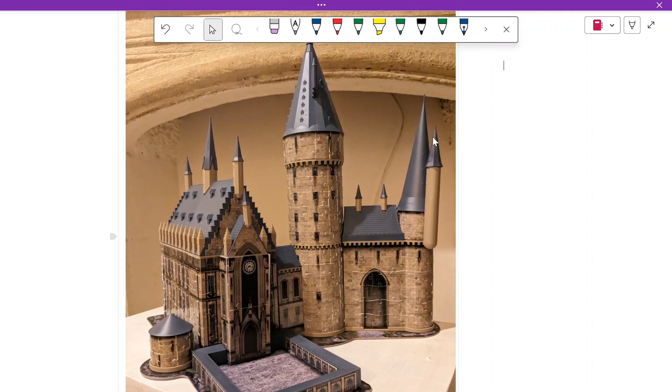After making it, which was a lot of fun, I decided why not make a 3D model of it on SolidWorks so the fun continues with this puzzle. I decided to make a tutorial out of it in case somebody is looking for a little fun project to do and work on their SolidWorks. For me, it's fun anyways. So that's what I'm going to do. I'm going to keep it very simple. I'm not doing it as I would at work.

I'm going to do it all in one multi-body part. To start any conceptual design, I usually have to get a good view on what I need. In this case, we already know we're replicating the model, but where do I start? I see two big structures. There is this part over here, and then there is this part over here. And anything else is secondary structures that either add some detail or do connections.

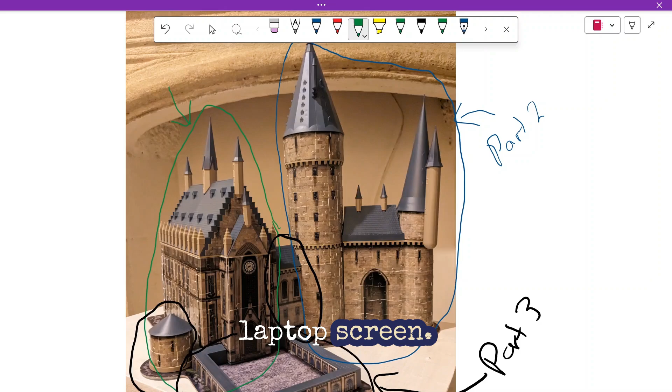So I think I'm going to start with this green structure over here, and then in a separate part video I'll do this part. I think the first part is a little bit more complex because you see all the detailing of the chimneys and stuff. And the last one and the easiest will be this part. So part 3, part 2. Sorry for my handwriting, I'm writing on my laptop screen. Part 1. So that's how it's going to go.

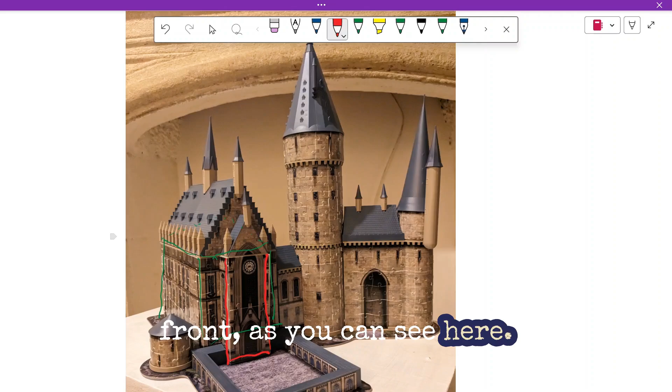Okay, first part, I look at the structure and break it into common shapes. I'm not putting any of the windows that are not extruding, the doorway, the windows, stuff like that. Instead, I'll do the bodies that extrude, and I'll keep them solid just to keep it very simple and beginner friendly. So what I see is that there is a big block here, and then there's a second block in the front, as you can see here. And then there are the triangular prisms. Those are the basic blocks.

After we have all the details of the chimneys, which are going to take a little while to make, but that's for the fun of it. We're doing this for fun, okay? This is fun. So without further ado, let's get started.

First, I'm going to start with the block. And I've already measured this. Your girl be organized.

12.5 centimeters. We're talking centimeters because I'm Canadian. Sorry about my American friends. And I'm living currently in France, which also uses a metric system. Sorry, not sorry.

This length over here is 23.5 centimeters. This width over here is 10. With that, we could make our rectangular prism.

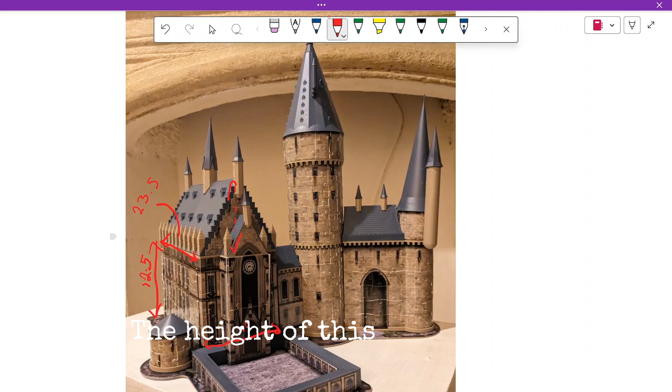And then after that, we could do the top, which has the following dimensions. The height of this is... Okay, I'm not that organized because I realized I did not write down the height of this. One second, please. We don't need the length because it's the same as here, the 23.5. And we don't need the width because it's the same as the 10 over here. And there is this part, which the height is the same as the 12.5. However, the width is 5 centimeters and the height is 4.5. Now, everything's approximate. We're not trying to claim that this 3D model is going to be absolute perfection because, again, this is for fun.

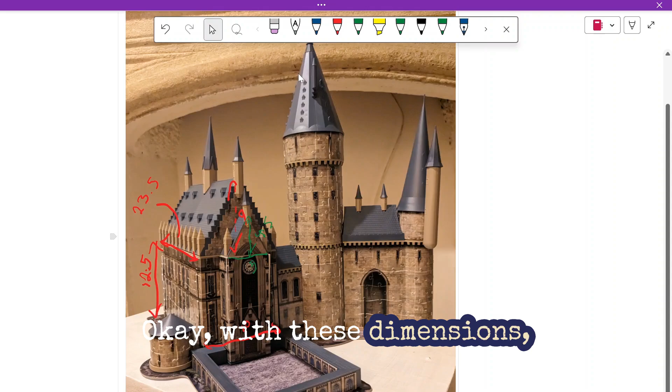Okay, with these dimensions, now we could start our basic building blocks. Allons-y. Okay, there's different ways we could do this. I'm just going to make a sketch on the top plane and extrude it in the Y direction. So let us do that. This one we said is... now my units are in millimeters.

I could change them to centimeters, but I think I'll just keep everything in millimeters. It's no problem, moving the decimal one place over. Voila. Okay, we had this as 10. What? Oh yeah, oopsies. That's going to happen a few times. I already know. Okay, extrude 12.5.

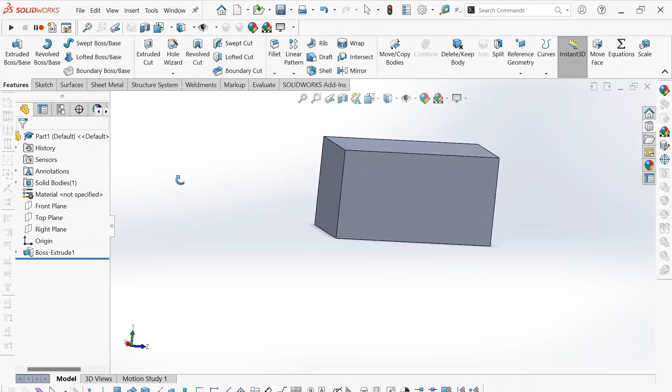Okay, now I should do the second block, the entryway, at the same time. I think I shall actually modify the first one and I'll just keep them together. I want to make sure that it's centered. I'm just going to make sure that the center of the line is vertical with the origin, which is the center of my big block. Now we need to dimension.

This one we said 5, so 50. That's good. When it's fully defined, it turns black, and when it's not, that means it's not fully defined. So this, which is blue, I can move it around like this. You want your sketches to always be fully defined, or else sometimes things get messed up and the sketches move and you don't notice it, and it's a nightmare to fix.

Now that we have sketch 1 with both rectangles, and because they have the same height, we could select both. You see, it gives a little preview. This looks good because they have the same height, we're extruding it the same amount, and it's easy to do at the same time.

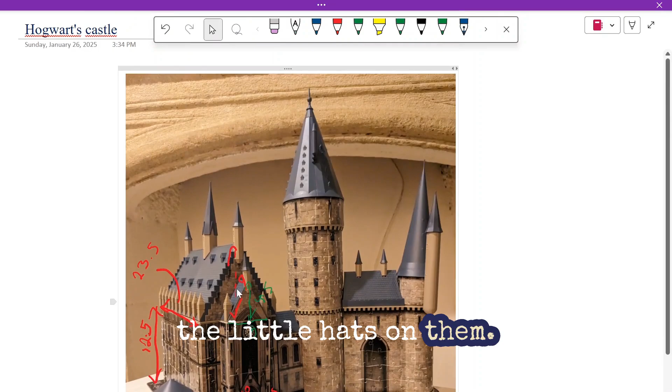Next, I want to put the little hats on them. We have one here with a different height triangle. They start from the same base, the top of the block, but this one is smaller and this one has a bigger height, and their extrusion is different too. This one is not very deep, same depth as this one, which was 2 centimeters I think. This one is 23.5. So I'm going to do either one sketch and extrude 2 different times, or 2 sketches. We'll see, that's going to be a surprise for me too.

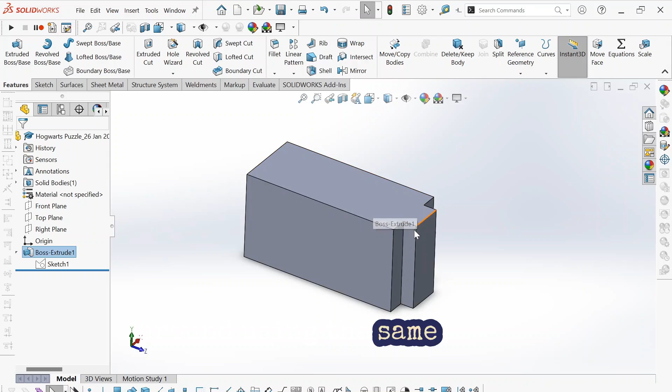I'll choose the same sketch to show you how to maneuver around using a sketch that has 2 different shapes and how to extrude it. So I'm going to make the sketch on this plane, right click and sketch. We're going to make a triangle, and I'm going to make sure it's coincident with this corner.

This shows a little guideline that it's centered around the origin, which is good. You see the yellow sign on the right of my mouse, I need to plug in my laptop. This coincident means that the line I'm drawing coincides with a point, which is the corner of my small block. It needs to be vertical and coincident with this.

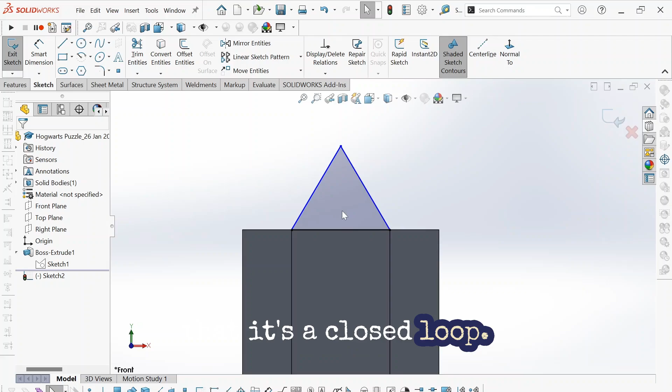Once it's grayed out like this, it means it's a closed loop. This line cannot be moved because it's black - why? Because one end is here and the other end is there. These two, although it showed it was in the guideline and vertical, we could move it around and have uneven sides, so we just have to put a condition. But first, I'm going to plug in my laptop so it doesn't die.

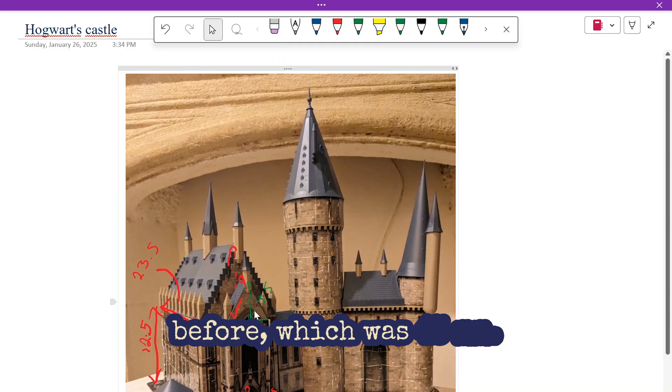So I was saying we need to fix our triangle. First of all, we're going to give the constraint that these two are exactly the same, which means our point can only go vertical now, which is good because we have to dimension it with the height of the triangle we had measured before, which was 45 millimeters. Okay, so that seems good.

I'm going to now do the bigger triangle. This time it's going to be coincident with here. We cannot extrude it if it's not a closed shape - if I had only put this line and not this bottom line, then I can't extrude it except as a thin body, I think it's called thin body extrusion, which is a different thing. We're not looking for that.

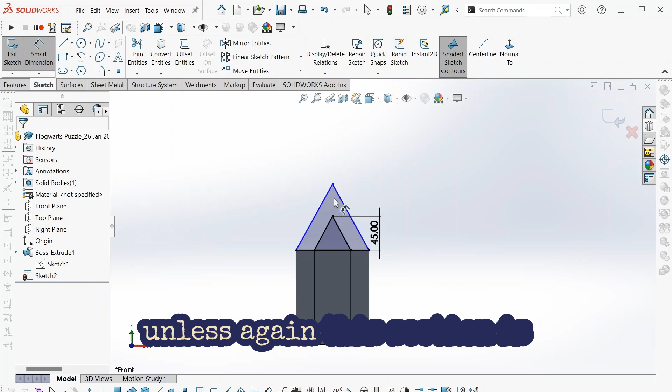Now I'm going to do the same constraints. I'm going to make this vertical with this. It's always better to have a base coordinate, for example the origin, to reference from. If ever this changes, we don't want this point to also change, unless this section is reliant on this section, which is not the case in our example. Okay, so this one is 90.

Both our shapes are colored in. That means they're closed contours, and there were black edges, which means they're fully dimensioned. Good, good, good. Looks like this.

Now, first part, I'm going to extrude the little one. By the way, you could hold down the right click, and here are common features - you could customize this. At the top is the extrusion, you see sketch 2 that we just did. But we don't want all of sketch 2, we want to start with this triangle, except obviously in the wrong direction.

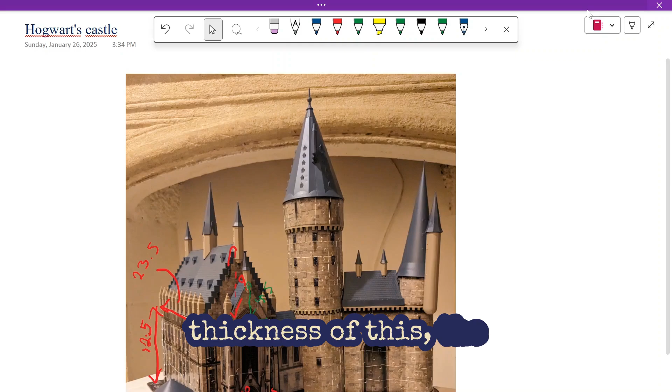We're not going to do blind, because here, this triangular section, there's a better way to extrude it. We know it goes from here to this plane - let me show you on the image. This triangle extrudes until this plane, or here on the block, because we don't have this part yet. So instead of putting the thickness of this, the better way is to actually reference the extrusion amount using this wall. Let me show you.

Right now, blind means that in any direction we could put any number and extrude it. Instead, we're going to choose the option up to surface. I want this from the sketch plane - we have other options, but here we're just choosing from the sketch plane, which started on this plane. We're going to extrude it to this surface - perfect, that's what I want. We could choose merge body. I will merge it, if ever we need to we could split the bodies, but I'll merge it just so it looks cleaner, meaning it combines and becomes one body. Okay, you see this part is looking good.

Now we're going to go to the second big triangular prism we have, which is this.

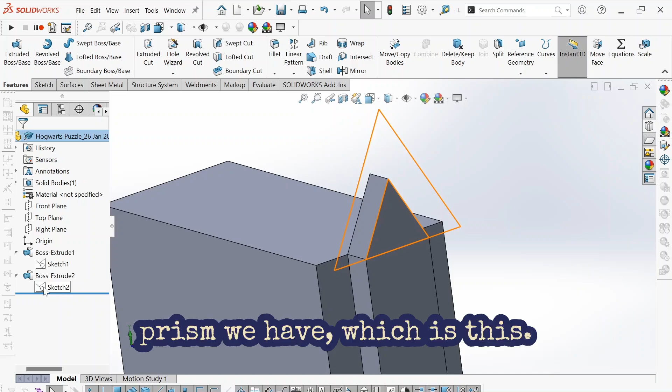We're going to do extrusion again. We're on sketch 2. If nothing's selected, I could go and select sketch 2. Right now, when you use a sketch, meaning you applied a feature on it, it gets hidden under that feature. So if you need to reuse the sketch, you could just open that feature and find it. This time though, I actually want just this.

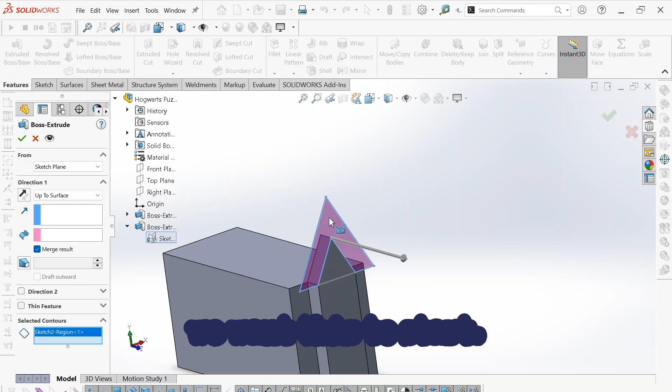Sketch 2 region 1, that's what this triangle is. If we use from sketch plane, it'll extrude it from here to where we want it. But we don't want that. We want it actually to start from this plane. So where this triangular prism, the small one, ended, we want this to start. We could offset it by giving a number, but again, it's better to use the geometry we already have.

So I'm going to do surface face plane, and I'm going to select this. Next, we can do blind, but I want to do up to surface like we have now. We don't need to set the direction because we're using 2D sketches, so it could only be extruded, in our case, in the Z direction. But if we had a 3D sketch, it could be extruded in different ways. I'm going to choose this because we want it to come all the way here.

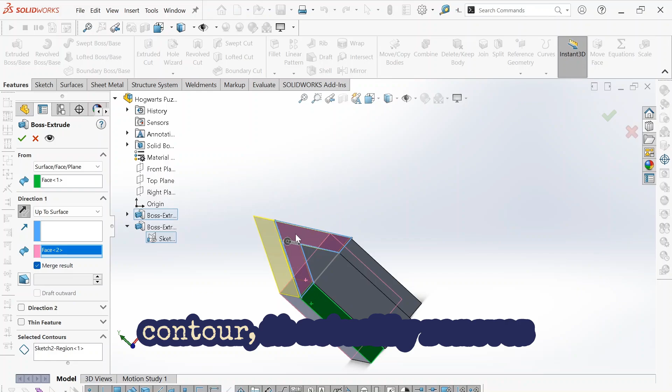Now look at this, in the preview there's a hollowed out triangle. Why? Because when I chose this contour, it removes this triangular part. So that way it does the full triangle. I selected the small one, instead of SolidWorks thinking that I'm taking a big triangle and hollowing out the small one from it, I'm going to just use both triangles to show that it's a filled big triangle like this. You see it starts on this surface and goes to this.

I will merge it again. Okay, this is looking good. At the end, we could also add colors and stuff, but don't worry about that. Let's go back to our image. We've done this part and this part. Those were probably the easiest parts we needed to do.

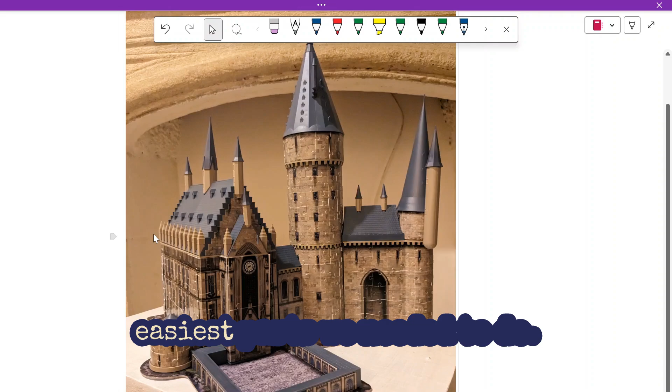Next, we could choose to perhaps do these little chimneys or these. I think I shall try one of these. Thankfully, with SolidWorks, we don't have to do every single one because we could just do a linear pattern, so we just have to draw one here. I don't know if you can see, but actually there's 11 chimneys on both sides, so there's here and here. The part that's a little tricky is that the chimneys, they're not rectangular prisms like this.

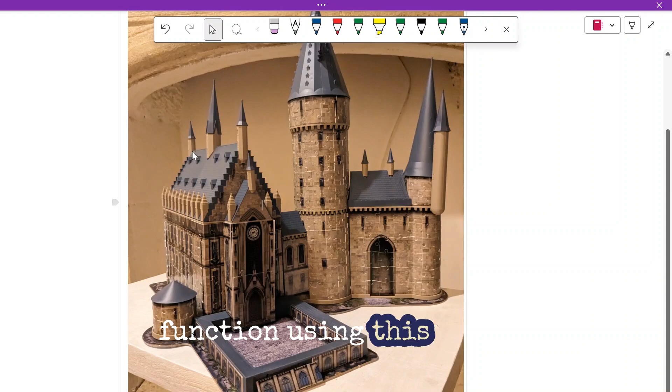Actually, it's slanted. So let's say we do a sketch on this plane, like we make a plane here and do a sketch on here. If I extrude that, it will extrude to the height I want, but then it's going to have a rectangular prism. And yes, I could do that and then use a split function using this plane over here to split it. But I could also just make another plane with the height I want, which here I measured as 10 millimeters, and then extrude it from this plane to the surface.

I'll show you, the other ones are just rectangles that you extrude and offset little by little. Let's see how that would be in real application. So, like I said, I want to make a reference plane. I want to make a plane that's 10 millimeters above this line. That's the start of the lower part of the chimney, and I'll extrude it down.

To do that, I could make a plane. The first reference, I'm going to take it as top plane, so it's parallel. I can put, so technically I know the heights that I want, so it'll be the height of this edge, which was 125, plus I'll do 10 millimeters, which is the height of the bottom part of the chimney.

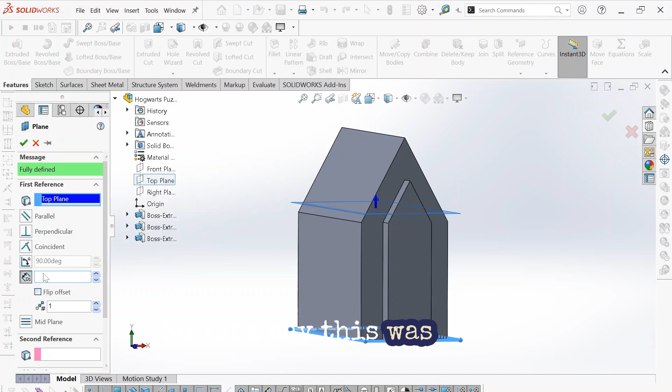I could have also made another plane with vertex of this. I'll actually show you. So let's say this was here. I could do a second reference of this reference plane. I put the top plane, so that way it shows it's parallel to the top plane. Second reference, I put this vertex and that it's at the level I want it. Now, I don't know how to actually raise it 10 millimeters, so instead it was 125 plus 10, so 135, whatever, okay, we're doing shortcuts.

Okay, so I want to sketch on this plane. Right-click, sketch, and I'm going to make a square. The first one starts right at the edge here, so I'm going to do a coincident.

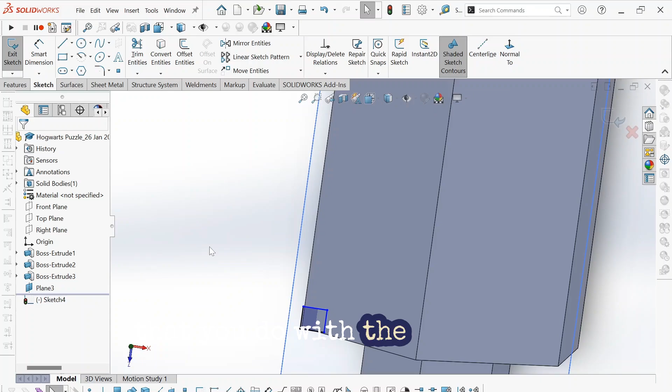I right click, it's the same thing you do with the features. You could do that in Sketch too. Right click and move up, it gives me the dimension. I believe I measured at 5 millimeters. I could do 5, or say these are equal because I'm assuming that's a square.

At the same time, I'm going to do the little extrusions that are on top of your chimney, the little details. So to do that, I'm going to simplify it a little bit, and just do offset. It's an offset entity function, which takes the entity you give.

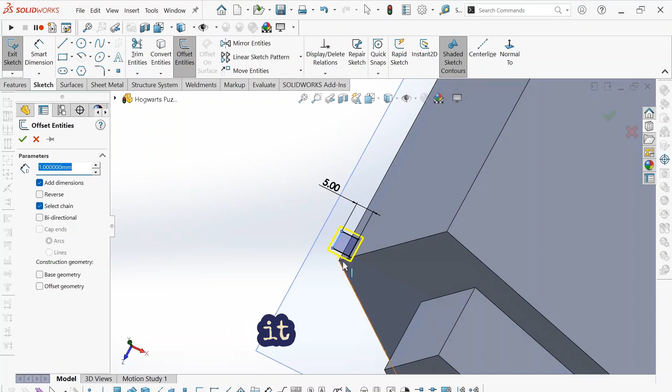I press on one edge, but because it's closed, it selects all of it. And because I said select chain, I'm going to try doing one, but it goes outside. So I'm going to reverse. Okay, let's try that. I'll do the same thing a couple times. I'm going to do reverse again, so it goes inside.

Here, I could only do this a couple times, so maybe I'm going to do 0.5 instead. Okay, this seems better. Same with this one, I'll change it to 0.5. Okay, now I could do it, because in the actual puzzle, it'll repeat like 6 times.

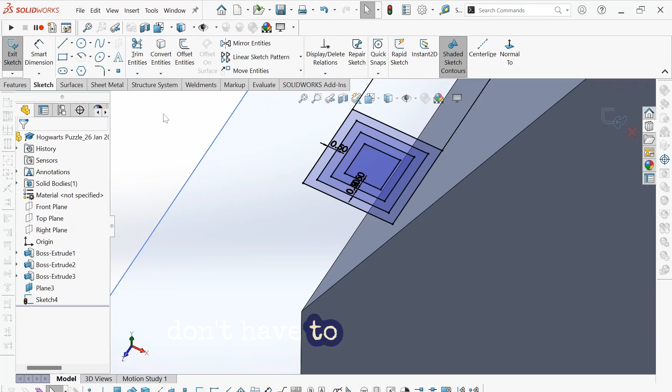I want to make the difference between them a little bit smaller, so I could repeat the pattern a few times. Reverse. Good thing it takes the value you last put, so you don't have to do it again. And repeat, reverse. Too bad it doesn't keep the reverse checked. I could do, for example, 0.25, maybe.

Yeah. Do I want to? Yeah. You know what? Yeah. Let's do it.

Okay, so now we got our sketch, which looks a little busy, but fear not. Planes usually don't get hidden automatically, so I'm going to hide it myself.

Extrude. So first I'm going to start with the outer corner. Here, I'm going to switch the direction. Instead of doing up to surface, which might work, let me see. Yeah, it works. You could also do up to next.

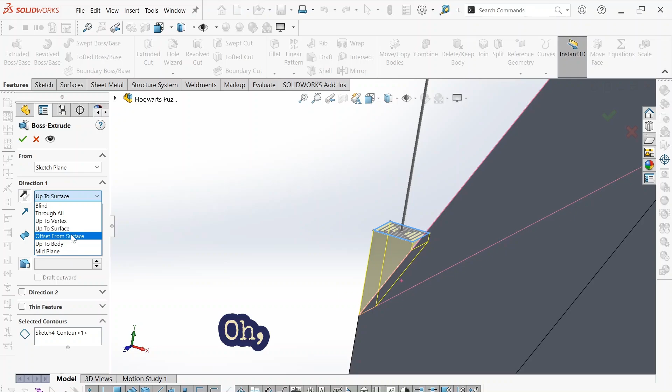Oh, it's not here. Okay. I don't know why it's not giving that as an option. Oh, was this here before? Am I losing my mind?

And you could also do up to next, which just goes to the next body, from the surface to the next body, or you could do up to surface and select this. I'm just going to do up to next.

However, I am going to check off the merge, so I could actually see the line differentiating this part of the castle and the chimney. Okay, let's see what it looks like.

Okay, that's fine. If we had done merge, this line here and this line here would not be there. As you see, the line for the triangle isn't appearing because we merged it. If we uncheck it, it would show. Okay, so that's fine. We need the sketch again.

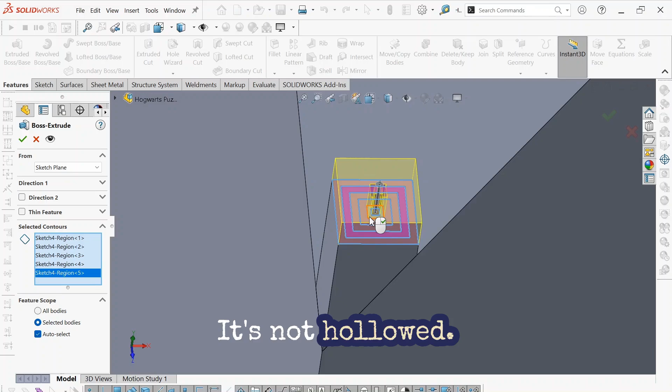Okay, this should be good. Let's see. Oh, I forgot one. The little one that I decided to add in is giving me trouble. Oh, this one says contour. Did it work? It didn't seem like it. Okay, seems to be okay.

I'm actually going to let this sketch show until I'm done with it. Except I extruded the outside, the very outside too, which is not the point. So I'm going to remove this part. See, now it's making the little ridges.

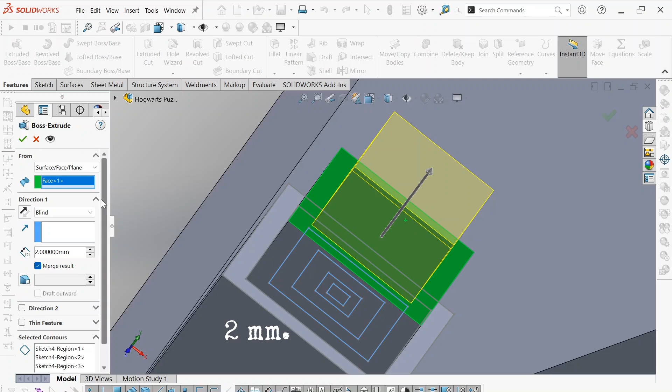I'm doing it from this surface because I don't need it to extrude from this surface, where the sketch plane is, 2 millimeters. I want it from here, 2 millimeters.

If you see, if I just do this part extrude like this from the sketch plane, you don't see it. So that's why I say from here. Now you see it.

So you see, I picked this one by accident, so I'm going to try this one to see how aesthetically it looks. I could hide this.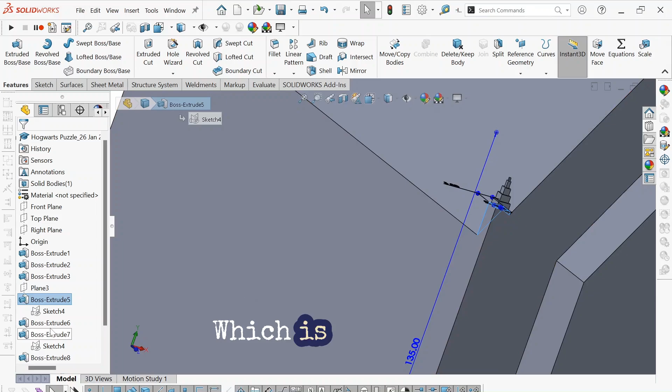Did I check? This is unmerged, which is good. I don't know why it merged it here. This one is this block, which is this one. Let me see if I unmerge it, what it looks like. Oh, okay.

I'm not sure why. I think I know why, because I did it from a sketch plane. Let me try this. Yeah, I don't know. But it looks okay now. Not bad.

So now we're going to take this that we've made and we're going to repeat it. Okay, to pattern this, you could rename these. When I'm doing it for professional reasons, I do rename because all this seems a little confusing.

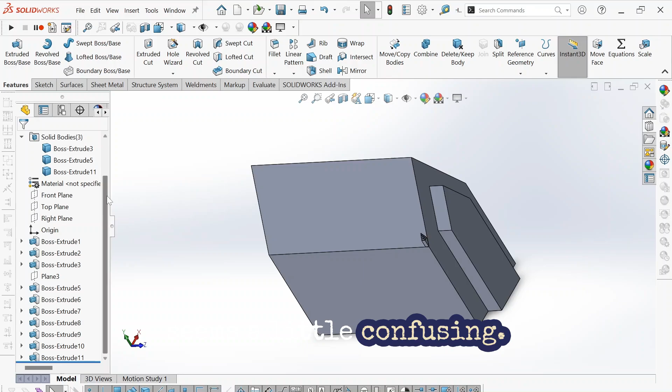Here in this tab, we have the bodies, and we have this big one, and we have this part of the chimney. Let me zoom in, this part and the top part. So I'm actually going to combine them. It's cleaner and it's easier to pattern. You could also select it from here. And we're going to add.

Do show preview. This will be a body. Good. Now you see there's this one, which I'll put as main. And this chimney.

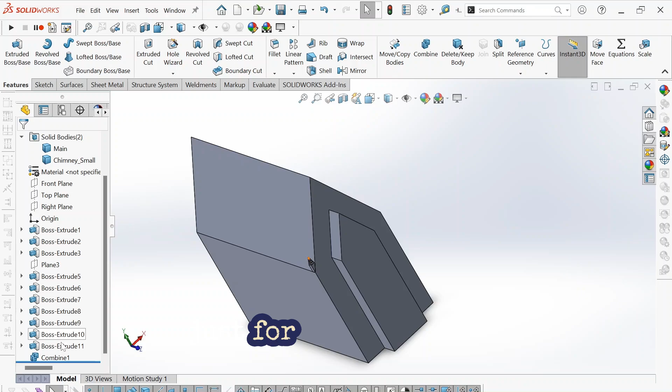I want to do a linear pattern of this. So I'm going to go to my linear pattern. I'm just going to choose what it is. Here I would have to select all, but instead I'm going to do bodies. And that way I go here, solid body.

I only have two, main and chimney. I want the chimney, it selects all of it.

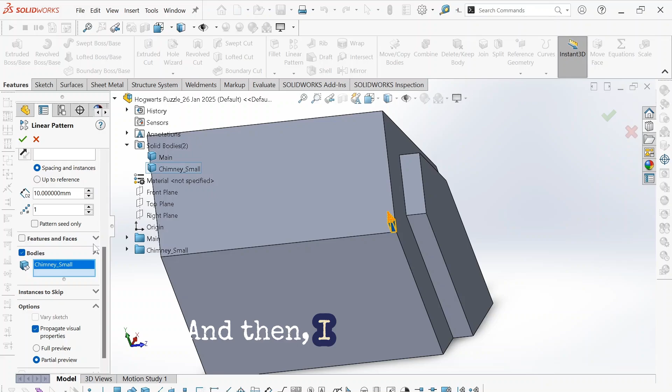And then I go up here. I only need one direction. The direction is along this edge. That's going the wrong way, but that's okay, we're going to change that.

So give, for example, 20 millimeters in a different direction, etc. But I haven't measured the actual distance between the chimneys. I know I want the chimneys to come all the way here. So what I'm going to do is select my reference, this.

I could either do it with the centroids, the middle of the body, or I could select what reference of the body to use. I know that the outer edge here needs to end here, so I'm going to choose this point.

Instead of giving a distance, I think we counted 11. Whatever, so now we have 11 chimneys that start here and go up to this reference. And I gave the specific vertex, this point here, to end at our reference. So if I say OK, see that it's what we're looking for.

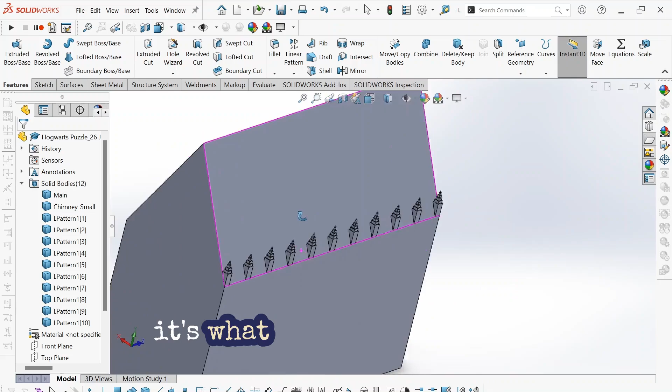Now I'm not going to do the other side because there's other detailing I'm going to add here, and then I'm going to just mirror it. So I won't do that right now, I'm going to do all at once. Always try to minimize the number of procedures you want to perform just to be as efficient as possible.

Now, if we go back to the picture, we've done this part in the main blocks here and here. But now we have these chimneys to add, which are the same, but they originate at a different point, although they're at the same height.

So maybe I'm going to use the same plane again, but do a separate sketch. Instead of using this edge as a point to be coincident with, I'm going to make it this edge. So we'll see what that looks like.

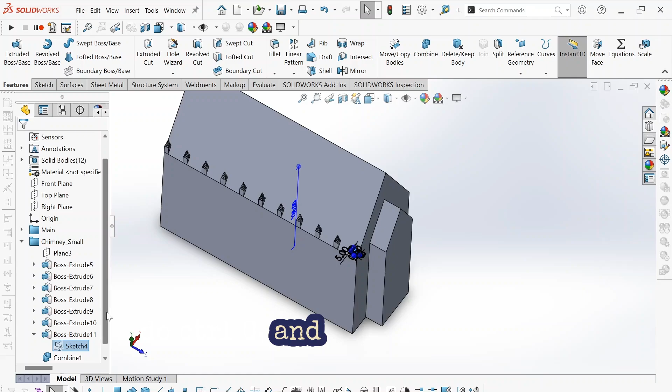So what I'm going to do is, I think I could copy this sketch directly. So I selected it, I do Control C, and then let's go to the plane that we had, sketch, paste. Okay, so you see that it's pasted over here. I'm going to, oops, no, that's not what I want.

I'm going to select, let's see if we could move entities. And I want to move this, let's say this. Okay. From/To, I don't have the actual x coordinates, but so we do this.

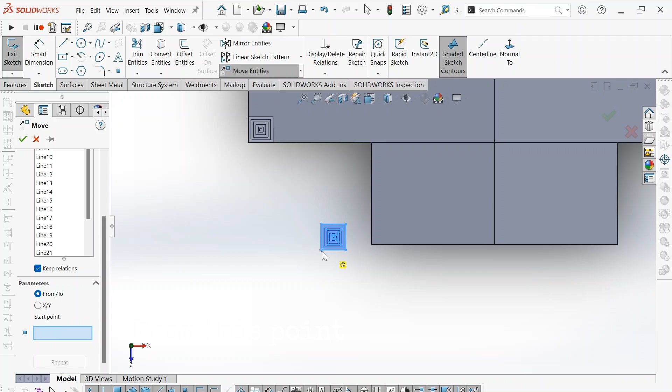I'm going to keep relations of them from this point to this point. Now you see it's still blue because there's no dimensions. It just copy pastes the lines that you have, but it doesn't carry over all the dimensions you have.

So this, let's see why. Okay, so it's not exactly coincident. So I did this, now I do this. It's a little tedious, I'm sure there's a better way, but I didn't think of a better way.

My bad, let's see. Where's my midpoint? Is my midpoint? Oh, here, so this is a filter. It only selects midpoints. Let's see if it works. No, it doesn't, it's okay.

Let's see, this. It's a little tedious, I'm not so happy with it. I think it's easier to offset. Don't you think? Yeah, let's do that.

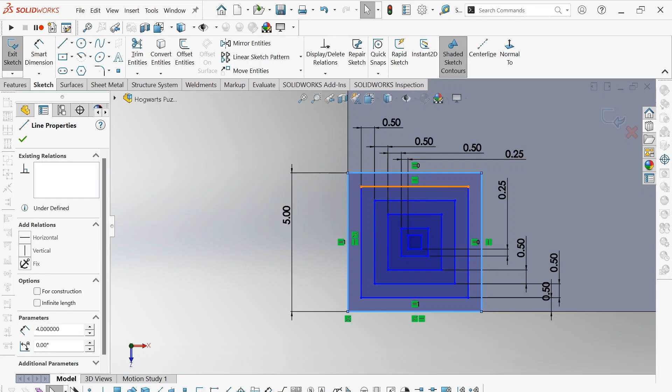I think if I just restarted the sketch, it would have been faster. But I'll leave this in just so you see the thinking behind design, taking away maybe not thinking which is the most efficient way, and then regretting it later.

Okay, we're going to do, it was 0.5. Oops, 5. Okay, and reverse. By the way, the shortcut is enter. If you've just used the feature, you could click enter to repeat it. So right now, press enter. Perfect, good, enter. Good, and last time, enter.

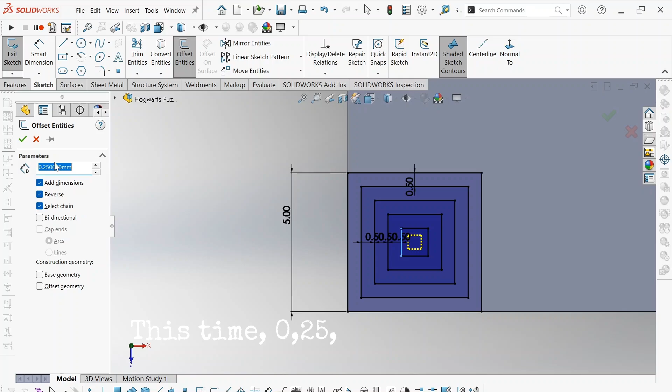This time, 0.25, I think it was. Voila, that's good. Okay, and basically, I'm going to do the exact same thing I did before.

So finally got this part done. But the little ones here are good. Next part, we're gonna do the little rooms that I'll show you in the picture. Now we're gonna put our attention to these little ones. We're gonna use the same concept as we did here.

Have a plane that starts a little above the roof and I extrude it downwards using up to next. And then for the little triangular part, I don't know if you could see, the triangular part extrudes a little bit out and goes to the roof.

So I'm going to use an offset plane for this surface because it's parallel. I'm going to extrude it like a millimeter out this way and then use the up to next function to extrude to the roof. And then we're going to pattern it. And I know that there's one here that is not included. I'll show you how to pattern and remove a single one or random other ones if needed.

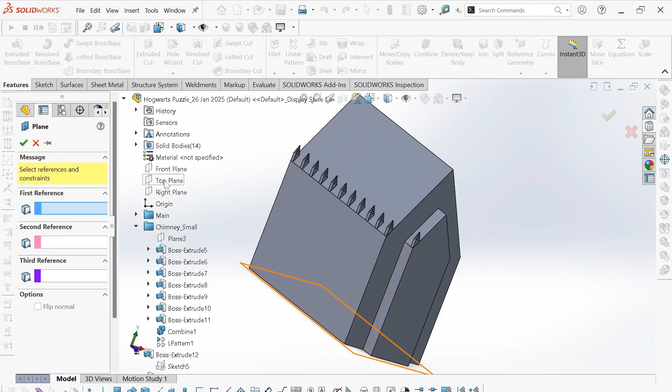I took some measurements. The first row is about 40 millimeters after this. So I'm going to use the same concept to make a plane, using the top plane as reference. Again, I could make a plane here and then measure it, or I know this distance. If ever I forget this distance, I have this measure tool. I put it up here, but you could search it up if you don't have it in the search command.

So I know that this is 125. So here I could say 125 plus, I know it's 40 millimeters more high. So it's here, which is good.

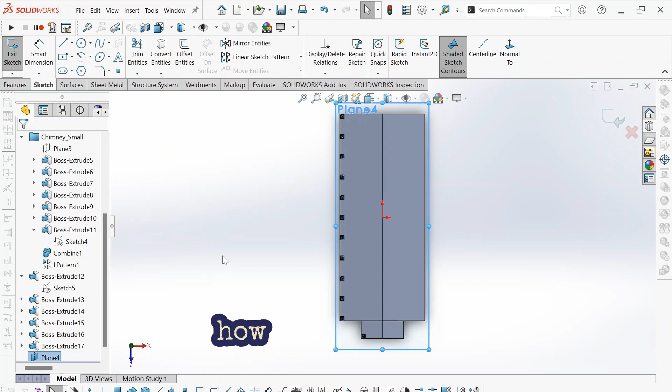Now I'm going to sketch on this. I'm going to eye it. It seems to be at the middle of this side of the roof. And there's how many of them? There's 5 of them in the first row. And they start 25 millimeters from here to here.

So I'm actually going to take this middle point and this center point and make them vertical, so they're in line. You see that it's still able to change size because I haven't dimensioned the actual size. So I think it was 10 millimeters.

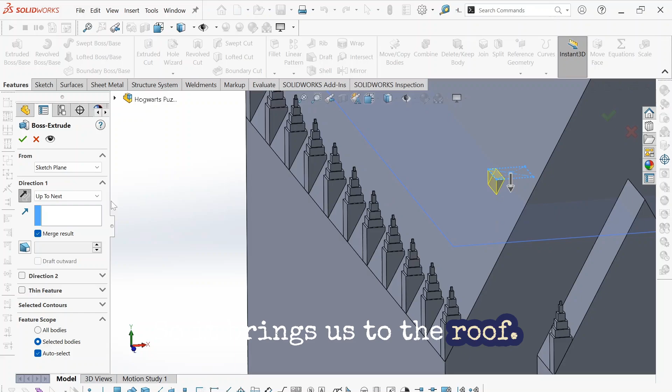Okay, so we have our sketch plane and we want to go up to surface, let's say, or up to next once we switch the directions. So it brings it to the roof. I don't want to merge it. This is fine. Now, just so it visually changes, I think it should extrude out a little bit.

Just a little more. I'm going to change the dimension a little bit, and I'm going to say, let's say 12. Okay, that's good. I'm going to save it.

Okay, so I'm going to make a plane as we did for the chimneys here, referencing from the top to the height we want, which was 10 plus 125. But instead, extrude it in this direction instead of top to down. And I'll show you why later. By the way, all this can go in here too.

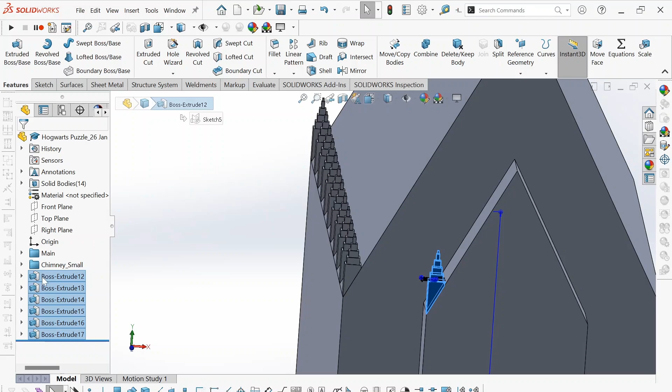New reference plane. We're going to use this direction, this plane as a reference, and I'm going to put it as the second reference, so that means it's parallel to this and goes through this point. Good. Now I'm going to do a sketch on this plane.

Good. From here to here, this distance, I measured it at 25. I'm going to make this and this, say 10. Make it equal.

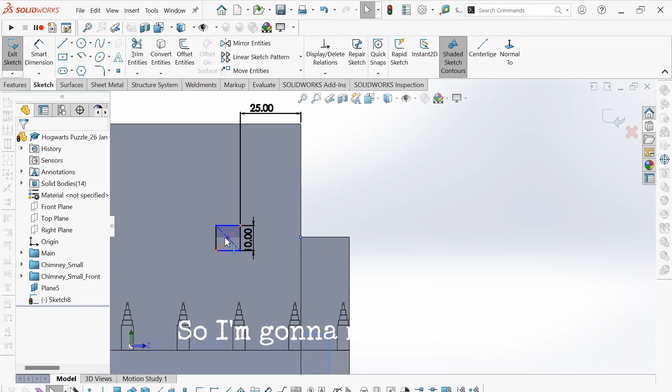You see that right now, the height is not fixed. So I'm going to make it the same height as here. The center of the square is in line with the midpoint of this edge.

I'm going to actually make the part of the top triangular like this. Right now it's not highlighted. Just making sure these points are connected. And again, I want to make this vertically in line, and this height is also 10.

Okay, now everything's black, everything's good. We have the sketch selected. I'm gonna extrude from the sketch plane, because that's where our custom plane is. I'm gonna switch the direction—up to next wasn't coming. I don't know why sometimes it doesn't show, but let's do up to surface.

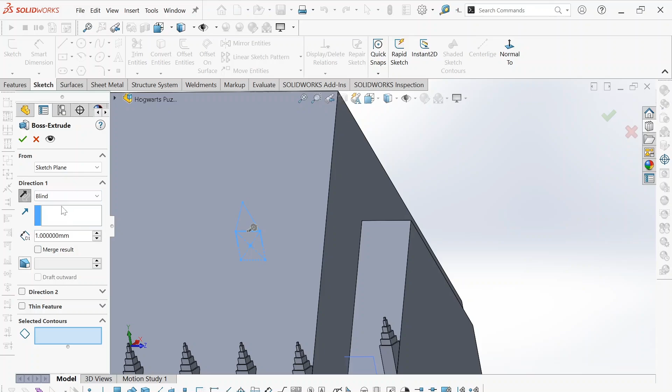Maybe because it's already intersecting the body. Let me see if I could try it again.

Also, we didn't select it. That might help, do the other direction. Up to surface, up to body maybe. And do this. Okay, this seems good. I'm not gonna merge. Let's see it.

Okay, not bad. Now, a little detail I like to add is that the little roof here also extends out a little bit.

So I'm gonna modify the same sketch we just made, and do an offset of this line, reverse it. Let's say 1 millimeter, yeah that seems good. Here I'm gonna say cap ends, that means it closes the line. Let's do line or arcs, I'll do arc. Okay, so now I have this extruded out.

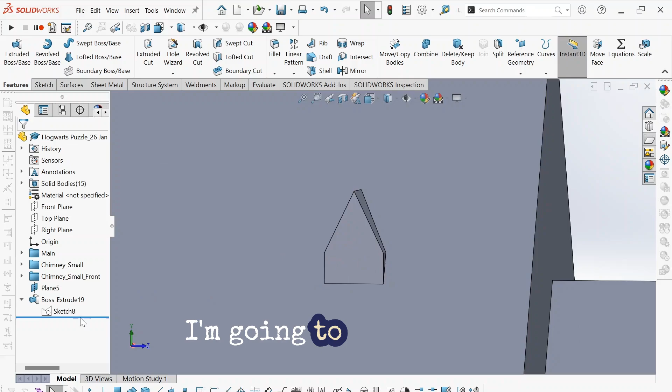I'm gonna highlight the same sketch, extrude. I'm gonna select only this part, and from here, this was what I was trying to explain before. I'm gonna offset it by, let's say, 1 millimeter. I want it extruding that way, up to body, where the body is this. So here, okay yeah you see it. This is the sketch plane. It extrudes 1 millimeter this way because I asked it this way.

And again, I don't want to merge it. So that's good, let's do it. Oh, look, it looks so cute. Okay, I'm going to combine this body and this body. There we go.

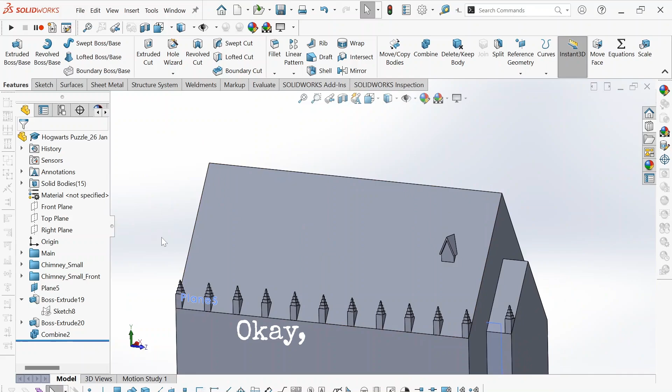Okay, I'm going to hide this plane. And as we remember, there are 5 of them across like this, so I'm going to do a linear pattern again.

Direction this, it's not a feature, but I'm going to do body direction up to reference. Let's do that. The reference, I'm going to use centroid. It's not on the edge, so I don't need it to be exact. But up to reference, let's say here is 5 of them. And I don't want it exactly up to reference, but the same distance from here to here, so let's do it this way.

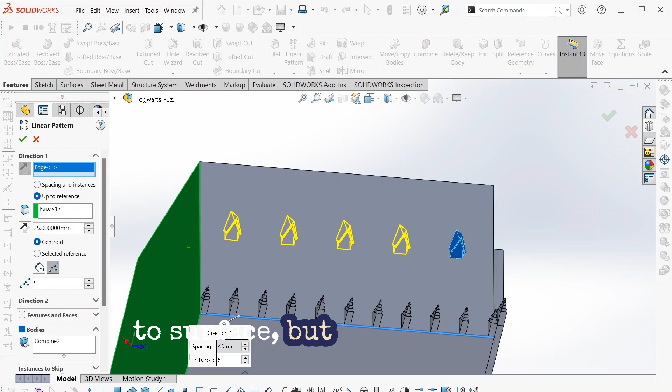What I'm basically saying is that I want to replicate this body along this direction of this edge. I want to do it by giving a reference instead of just giving the spacing of 45 millimeters in between. I want to reference up to here, the surface, but offset by 25 millimeters. And I switch the direction, so instead of passing this way, it passes this way.

That's good. I'm going to try something to see if I could do 2 directions. I just don't know if it'll work because it's on a slope, so let's see if it works. Surprise me. So in a direction, it's not vertical. I don't want to go up like this, or else it would be like this edge. I want it to go in an angle.

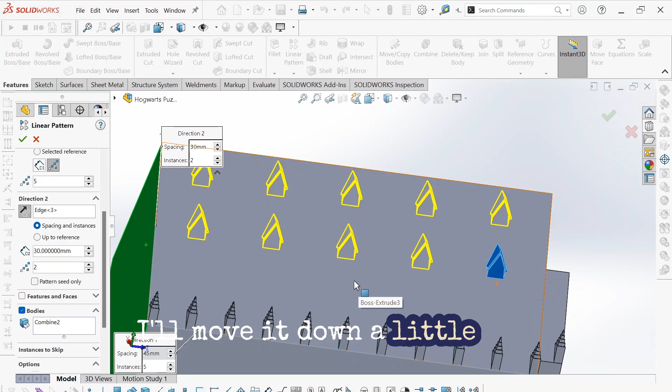Okay, so let's do this edge. This time I'm going to do spacing, and a double of each instance, say 30. Okay, I can see that my first line is a little higher than it needs to be, it's not the mid. So maybe at the sketch plane I'll move it down a little bit. We'll see - so you see it actually works because I put the direction as this sloped line.

Now, I did say that in the image we have 5 on the bottom. We actually have 4 on the top because this one is not there. So how do we do that? We can go to instances to skip.

Here, it puts pink dots on all the ones that are selected. And I don't want this, so I unselect that. The third from row 2 is to be skipped. That's good, I like that.

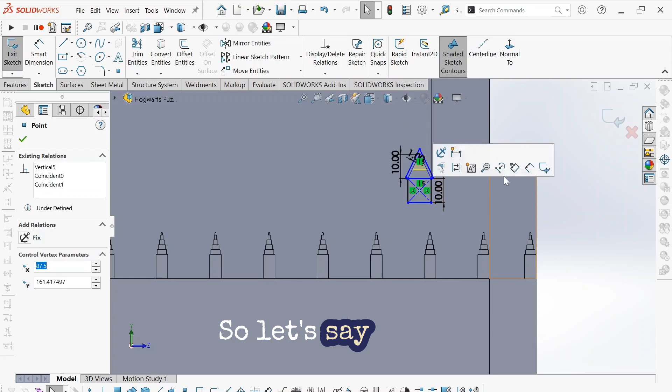I just want to modify this and bring it down a little bit. Instead of making it just the midpoint horizontal, I'm going to delete this and move it down a little bit. So let's say maybe this midpoint - actually, select, right click, select midpoint. Let's see how that looks.

Not good. I think I need to move the plane a little more outwards. I put it at the dots, so let's say move this. Let's try eyeballing it - okay, let's say 40 in the other direction.

Actually, I'm going to measure it so I know. So this is the midpoint that was originally. Here you can see that normal distance is 25. So if I wanted to come a little bit more out, let's say 22. So basically, this plane that we originally did our sketch on, we moved it a little bit in the negative X direction, so it extrudes out a little bit more than it did a minute ago.

Okay, so this is looking good. Okay, last part of this section. We've done these little tiny windows, now we have these big towers. So we have to figure out how we want to do it, if we want to simplify it, which I will.

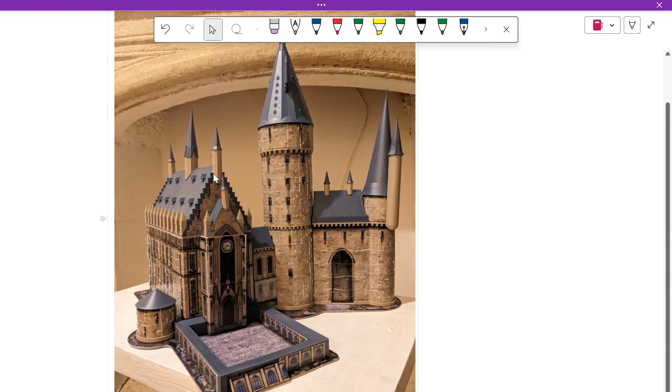So all of them are hexagonic, they have 6 sides. So we could make a sketch parallel to the top plane, looking down, have the plane offset and then extrude onto the roof, as we've done with the base here and the house - the house we actually did it in this direction instead of up down, but same idea. Then just put a simple pyramid. I'm going to do the same concept of having the hexagon drawn and then offsetting it on the interior to have these details.

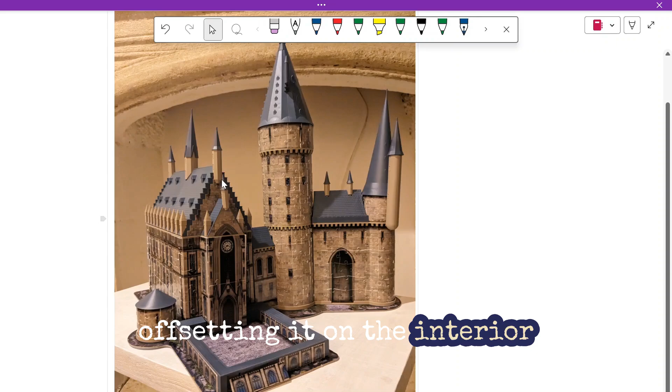But I just thought of something. If I extrude a plane downwards, it'll work fine for some parts, but for others there's a section that extrudes and a part that goes all the way down. So I'm better off putting a plane at the height I want, extruding it all the way, then splitting it using the roof to remove the excess. I could technically keep it since it's a solid, but it's a good exercise to show you. This will use a slightly different method. Let's try the big one first.

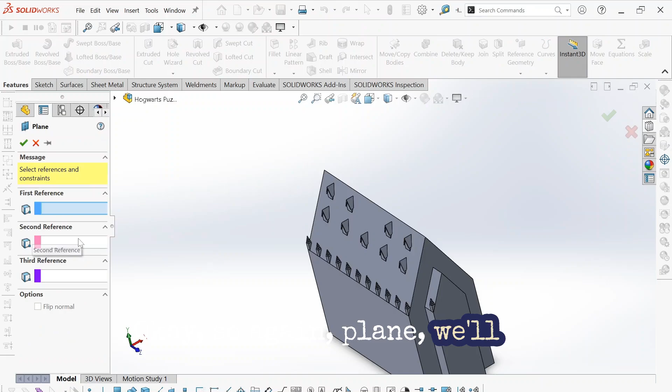Okay, plane again. We'll do top. I'll use the shorthand version. Here is 215, click to copy. So it's going to be 215 plus the height I want, which is 15. That's the top, where the hexagon will be sketched and extruded to the body.

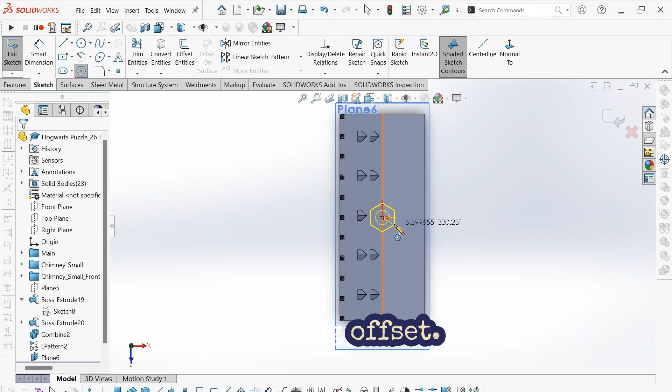Okay, this is fine. Let's sketch on it. I have a polygon here with 6 sides. Good, don't worry about it being offset. Now we just need to put the size, which you could do as a diameter, but I'm going to eyeball it. This one seems good, though it's still not fully defined.

It could be rotated like this. I could first do this and make it parallel, or this, since I want it vertical. Yes, it gives you a suggestion which one to choose. I'll do this part first.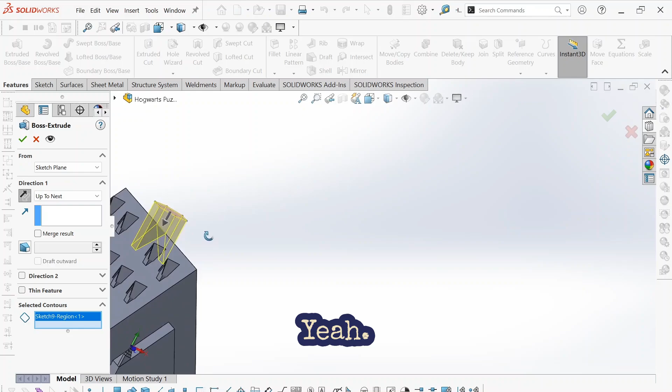The sketch - I'm going to extrude the whole thing. Well, you already had it selected. I'm not going to merge it from the sketch plane, that's fine. To next. Yeah, that's how it's supposed to look. Okay, that's good.

Then for the cone, how are we going to do it? Let's do revolves, so I could actually use a 3D sketch. Here we have a regular one, but we also have 3D - here you don't actually choose a plane. This could get a little confusing, but don't be scared to try.

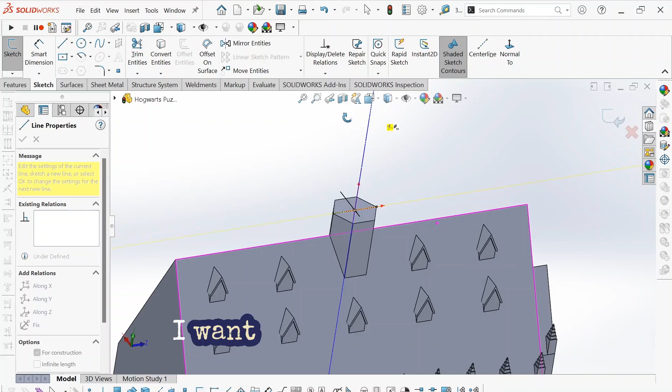Okay, so what I'm going to do is an axis - a construction line from here to here, which gives me a midpoint. Just be careful you're going in the right direction. I want it to go vertical, in the Y direction. There you go. Then I'm going to give the height I want the conic part to be.

60 - you know what, we're gonna make it a little dramatic, 75. Okay, so now using the revolve feature, I'm gonna make a 2D profile that's going to revolve around this axis to make it circular. I'm gonna do a line from here to the midpoint here. Always rotate your camera to make sure you're selecting the right thing, because in 3D it's a little tricky.

I want it to come out a little bit - I don't want this coincident line, instead I want it to pass a little bit. I'm going to make sure this is along the X, and make sure it's on this surface. I'm going to make a dimension from here to let it pass 1 millimeter. That's enough, I think that's good.

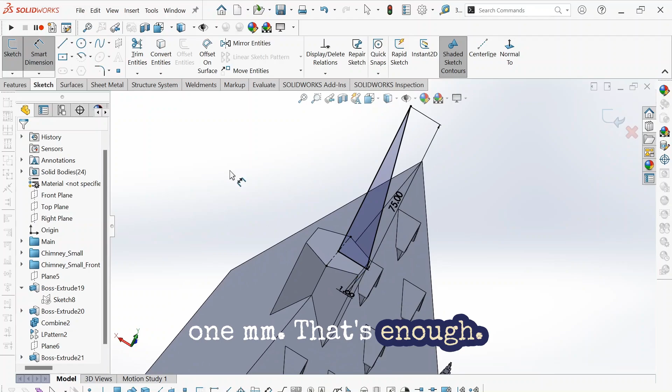So now we're going to use the revolve feature on this sketch. Revolve. No, why doesn't it work? Please hold. Okay, quick Google search - apparently you can't actually use 3D sketch for revolves.

I'll keep it instead of redoing it. I'll do it on this front plane - it's already on the front plane. So I'll do sketch, I'll just convert it - convert entities, I'm going to select chain so it does everything. So now we have a 2D instead of a 3D. I can't delete this because this 2D sketch is referencing it.

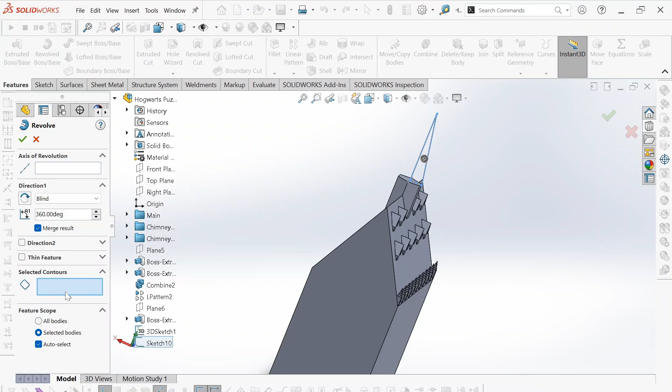Okay, let's do this. There you go, it selected my sketch. I select the contour, I want 360 axis of revolution. This one, I want it to stick out a little bit more. Let's try 2 millimeters - you know what, 3, go big or go home. Okay, that's better.

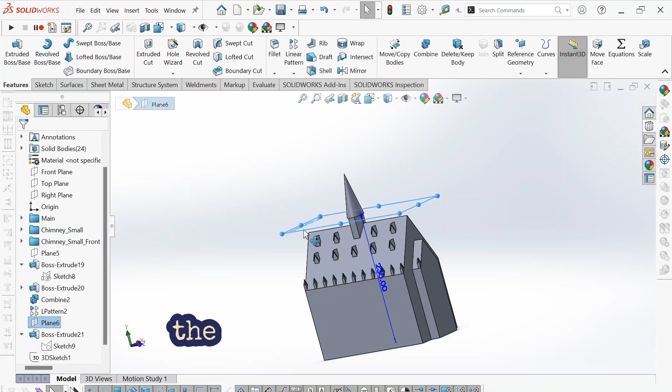Okay, that's good, I'll hide this. Again, we simplified the shape, but that's fine, it's supposed to be beginner. And lastly we have these little parts, this and this, and then this little one. I'm actually going to use the same plane here because the hexagon prism all starts at the same height for the tower here and here. This one's different, but this one we could use the same.

So I'm gonna do this, hexagon again - this time the middle is on here. I'm gonna draw one and then mirror the other one. Okay, this one, let's say 15 - let's see what 15 looks like. Okay, 15 looks good, the flat part should be here. So I'm gonna make it horizontal, and voila, it is fully dimensioned. I don't like using blind when I could help it, but let's do it for time's sake. 35 maybe? Okay, that seems good.

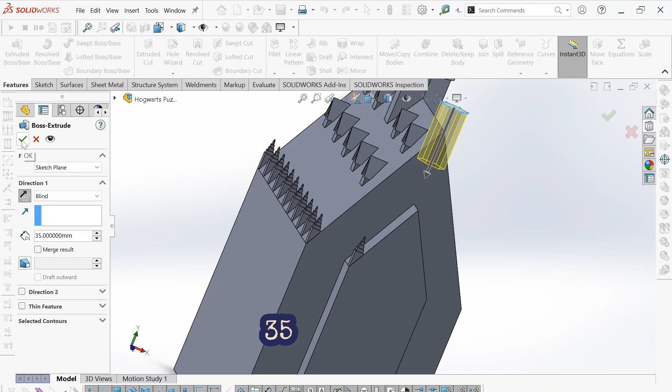35 is good. Okay, actually, I forgot to do the offset parts. It's doing that because it doesn't know what contour to select when it's extruding.

We want this. Okay, and then again, same idea as before. We go this. Select from surface this. And let's say 2 from surface, line, and contour.

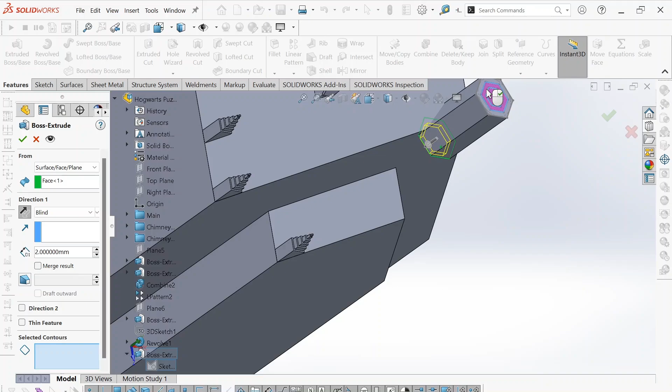Okay, that's good. Now you see that this actual body, let me show you here. It goes in and it's not really separated here. It doesn't have the lines, the edges. So we're going to split.

Instead of using split, I'm going to use something I haven't actually used yet. It's intersect. So we take 2 bodies and create intersecting regions. And now it comes up with 3 bodies.

1, 2, 3, or 3 regions. There's this one, which is region 2. There's this one, region 1. And there's this one, which we can't see because it's inside. And I want to consume this region. So I'm going to do that.

And you can see now that we have the edge that we want. There's this, and then there's the main that is here. Later you could rename all this, but right now it's not my priority.

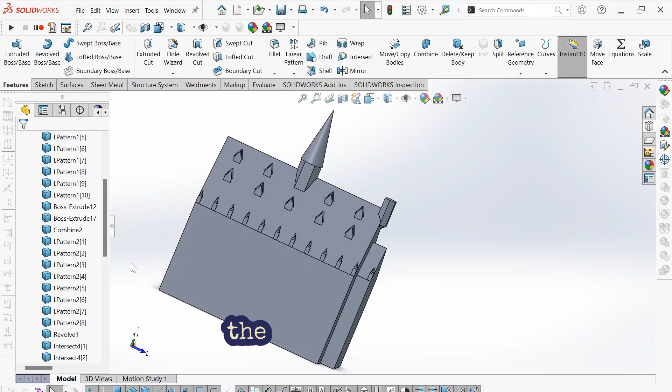For the revolving feature, for the cone parts, I'm going to do exactly the same thing as here, so I'm going to speed it up. Now I'm going to do the last one. I forgot to do the offset, so once I exit out, it's going to give me an error. No problemo, important is just to know why and understand.

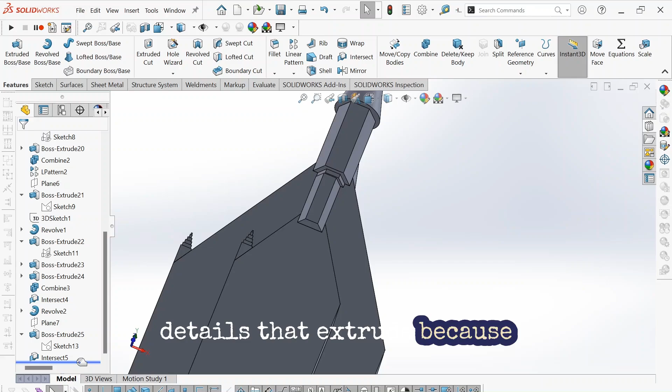Good, same thing, we're going to use the intersect, which is something I learned new today. So that's nice, we want to consume. And lastly, before I do the intersect, I want to do the little details that extrude because I want those to be cut too.

You can actually change the timeline, so you see right now it's not extruded. Do what you need to do and then extrude. I'm going to use the sketch again. From face is good, blind.

And lastly, here you could tell I didn't properly select, there's a hole. It's giving intersect error because we added bodies. Let me just check if these are one body right now. Yeah, okay, so you see that's why it can't intersect, because right now it sees all this blue as one body. I'm gonna go and merge.

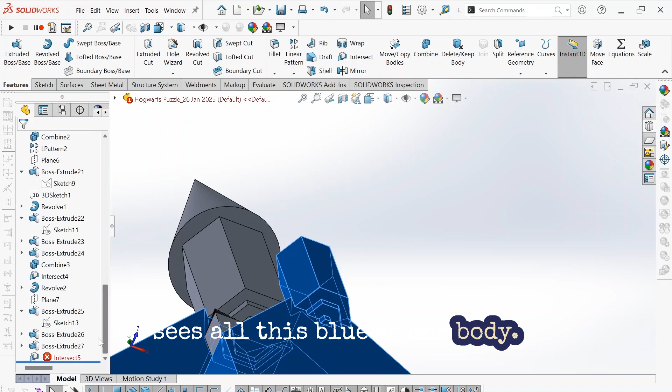Again, I'm gonna move this up, combine this. Okay, that should be good.

And the last step of this part, right plane, make that little triangle. I could use the right, top and front plane because I made sure that my part is symmetric. I highly recommend you should always have your parts symmetric so you could take advantage of these. Anything you need to mirror and stuff, you don't need to recreate any planes, and it's more clean.

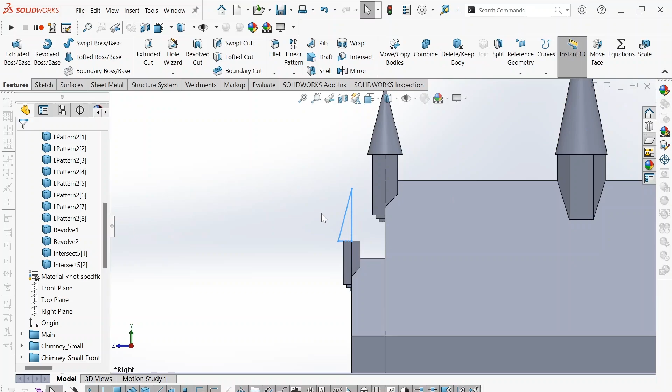Okay, that is good. We just need to do a couple mirrors. I'm going to save because sometimes with the mirror command it always crashes. This one's pretty simple, so it should be good. Again, I'm using my front plane as a mirror for this. I don't need to do features or faces, I do bodies.

Perfect, and then I need to mirror all this. I just have to select all of them. You could also do it via the list here. There we go, first part done.

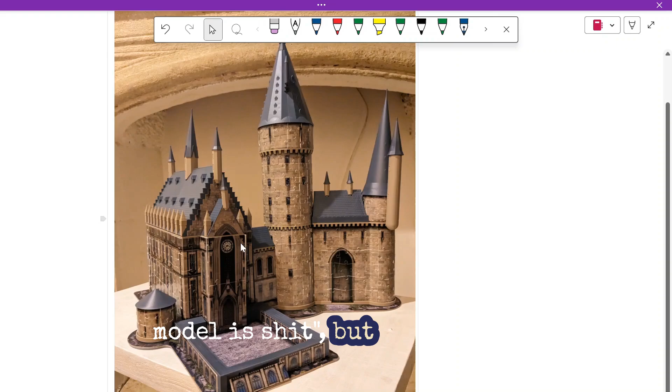When you go back to the image, you see all the details and the colors and you think, okay, the model is shit, but that's okay. It's not the point. Obviously it's not going to be as pretty as this, but yeah, I like it. There's some details that I've omitted for simplicity's sake.

So that is it for the first part. Next part, I'm going to focus on this section. And then the last part is just the little details and the little structures around it.